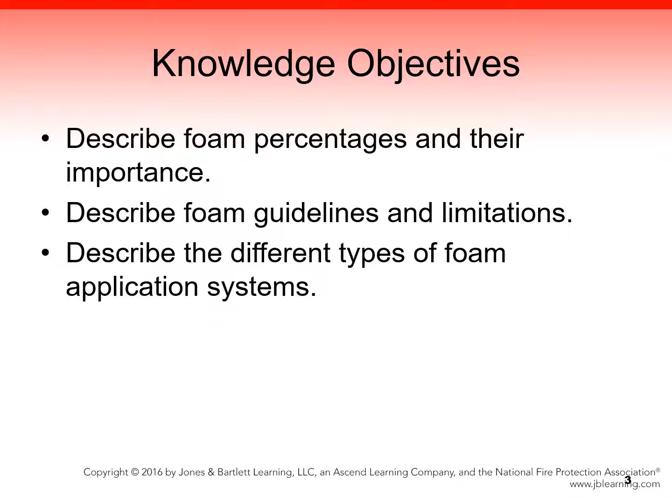Water has been the main means of suppressing fires for many years, and water is effective, bountiful, and relatively inexpensive to use. And while water is certainly effective, foams have added a new dimension to fighting fires, as I mentioned in the introduction.

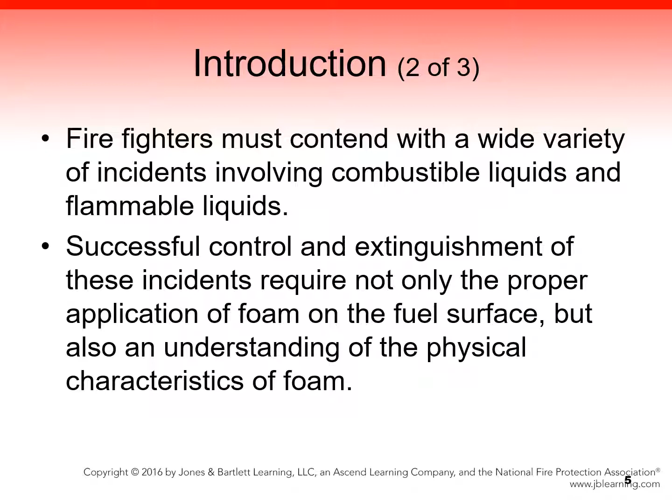Among the many hazards that firefighters must contend with today are a wide variety of incidents involving combustible liquids and flammable liquids, and successful control and extinguishment of these incidents requires not only proper application of foam on the fuel surface, but also an understanding of the physical characteristics of the foam itself. A full understanding of foam and its application is imperative to a safe and successful suppression operation.

Lack of familiarity with the chemical characteristics of foam and its application can cause severe problems for both you and your crew. Know your equipment and always operate safely. Improvements in and greater simplicity of application techniques and the versatility of foam concentrates makes the use of foam for all types of fires more common.

The National Institute of Standards and Technology, or NIST, has determined that foam is 3 to 5 times more effective than plain water in extinguishing fires, and this can justify its use and its added expense at an incident site.

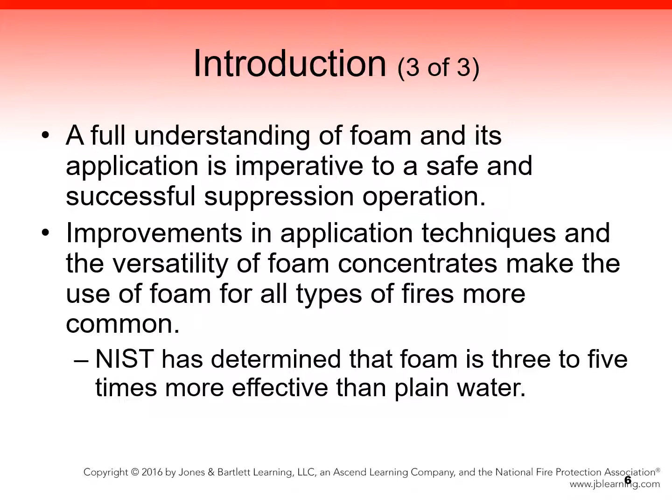While foam has been available for firefighting for many years and was first used in the 1900s, it was introduced as an extinguishing agent for flammable liquid fires. This original foam was produced by mixing two powders, aluminum sulfate and sodium bicarbonate, with water in a foam generator. This method was used for chemical foam extinguishers as well. Inside the fire extinguisher, the two chemicals were stored separately. Then to operate the fire extinguisher, a seal was broken and the extinguisher was inverted, allowing the aluminum sulfate and sodium bicarbonate to mix and create the foam.

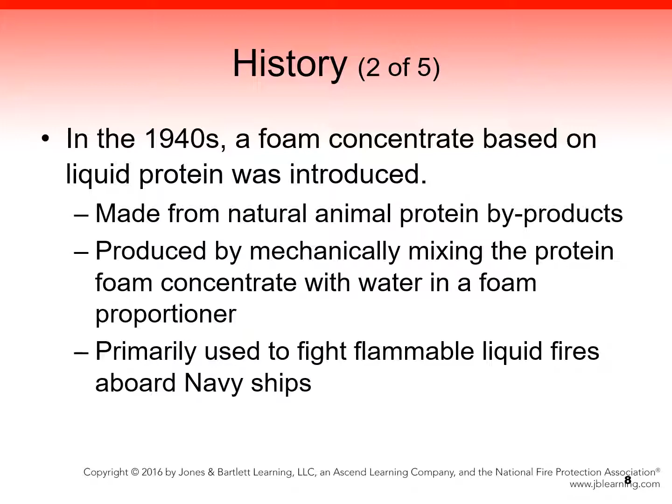In the 1940s, a foam concentrate based on liquid protein was introduced. This foam was made from natural animal byproducts. It was produced mechanically by mixing the protein foam concentrate with water in a foam proportioner. A foam proportioner is a device that mixes the foam concentrate into the fire stream in the proper percentage. Protein-based foam was primarily used to fight flammable liquid fires aboard Navy ships.

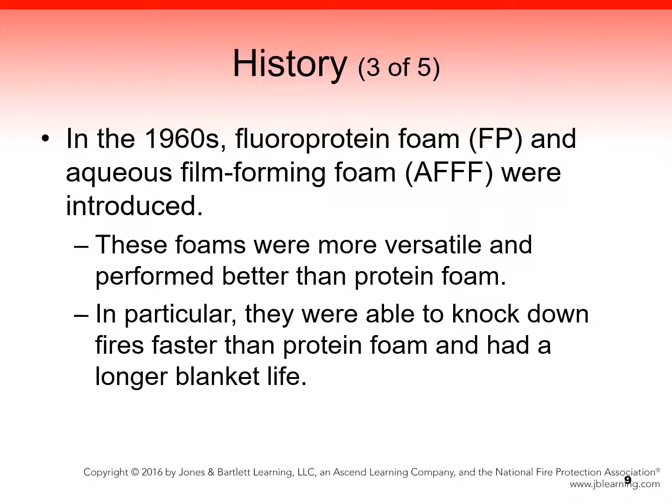In the 1960s, fluoroprotein foam, or FP, and aqueous film forming foam, or AFFF, were introduced. These foams were more versatile and performed better than protein foam. In particular, they were able to knock down fires faster than protein foam and had a longer blanket life. In the 1970s, alcohol-resistant foams became available. These foams could be used for fires involving hydrocarbon or polar solvent fuels. The introduction of alcohol-resistant foams allowed flexibility in dealing with the many types of fuels that firefighters encounter on a daily basis.

While the use of foam has been limited in the past for many reasons, the technological improvements made to foams and the equipment associated with their application have made these agents' use more common and acceptable in today's fire service. As more fire apparatus have been equipped with foam systems, operation and maintenance of these systems has emerged as an important skill for the driver-operator. The knowledge necessary to properly operate and maintain these systems can only come from learning about and training with all the systems.

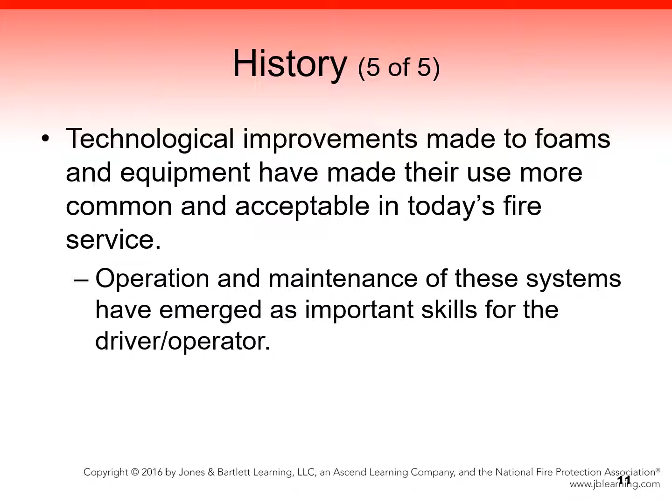With the introduction of the automobile and the industrial use of petroleum products, firefighters soon realized that water was not effective for extinguishing fires involving these types of products. Water is heavier than petroleum, so its application to petroleum-fueled fires caused more problems than it solved. In fact, water would actually spread the fire and make the situation worse. A method was needed to deal with the growing use of petroleum products and the resulting incidents when these products ignited. Firefighting foam was one of the methods available to deal with these issues.

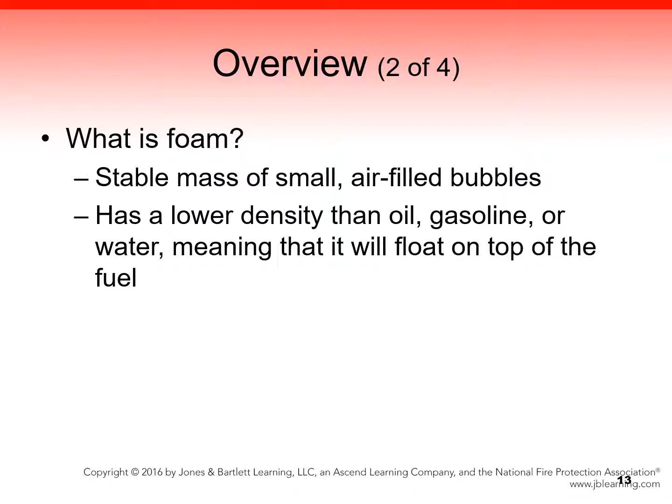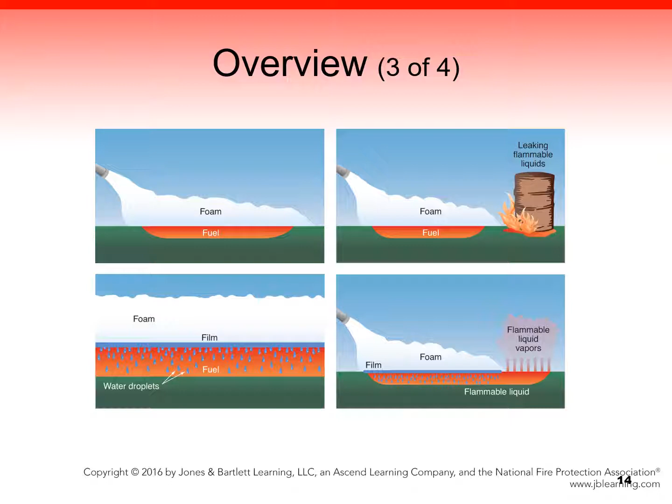So what is foam? The foam used for firefighting purposes is a stable mass of small air-filled bubbles. It has a lower density than oil, gasoline, or water, meaning it will float on top of the fuel. The way foam works to help extinguish a fire is simple, illustrated in figure 14-2. Once applied to the burning fuel, the foam will float and form a blanket on the surface. This blanket, if applied correctly, will stop or prevent the burning process by separating the fuel from the air, lowering the temperature of the fuel, and/or suppressing the release of flammable vapors.

Foam is created through the application of four components: water, foam concentrate, mechanical agitation, and air. First, water is mixed with a foam concentrate in various ratios to produce a foam solution. This solution must then be mixed with air by some form of mechanical agitation. In firefighting, this mechanical agitation usually takes the form of a nozzle that mixes the air and foam solution to form the final product, which is referred to as finished foam.

The ratio of water to foam concentrate is critical. Too little foam concentrate in the water will produce a foam solution that is too thin or lean to be effective, and may quickly dissipate into the fuel itself. Too much concentrate will produce a foam that may be too thick or rich to be properly expanded or aspirated when mixed with air. The expansion of foam solution depends on good mechanical agitation and effective aeration, which is the process of introducing air into the foam solution.

When an insufficient amount of air is introduced into the solution stream, the solution is poorly aerated, resulting in foam with too few bubbles. Fewer bubbles causes the foam to break down so quickly that it does not suppress vapors effectively, and poorly aerated foam will also break down quickly when exposed to heat and flame.

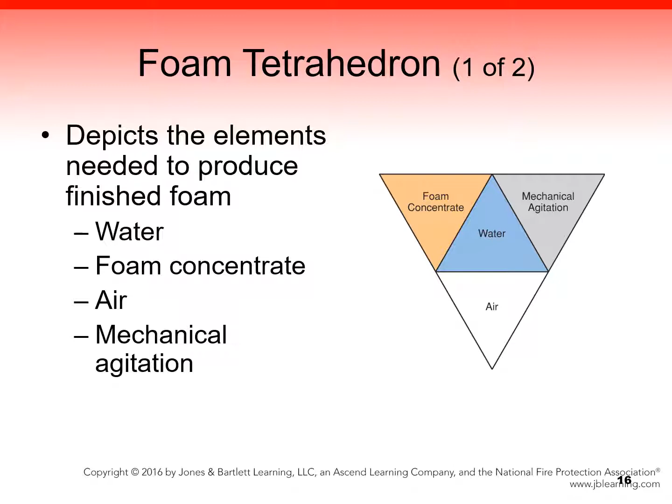Let's discuss the foam tetrahedron. A foam tetrahedron depicts the elements needed to produce finished foam, shown here in this slide, which is also in your book as figure 14-3. If any of the elements of the tetrahedron is missing or not present at the proper concentration, foam production will be affected. This results in poor quality, ineffective foam, or no foam being produced at all. The foam tetrahedron requires four components: water, foam concentrate, air, and mechanical agitation.

Foams come in two basic types: chemical foams and mechanical foams. Chemical foams are produced through a reaction between two chemicals, like those used in the chemical foam extinguishers of the 1800s. Today, this type of foam is rarely used because it requires the combination of two different chemicals before the foam can be made, which may be difficult to carry out at a fire scene. Also, because of the large amount of powders required, this type of foam has become obsolete in today's fire service.

Mechanical foams are produced when water and foam concentrate are mixed in the appropriate amounts, or proportioned, and the ratio of foam concentrate to water must be correct to ensure the foam creation and operation is effective. The class of materials involved in the spill or fire, which dictates the type of fire, determines the percentage of foam needed. Hydrocarbon fuels such as gasoline, jet fuel, and kerosene have a lower density than water. When these types of fuels and water are mixed, the two fluids quickly separate and the fuel rises to the top while the water remains on the bottom.

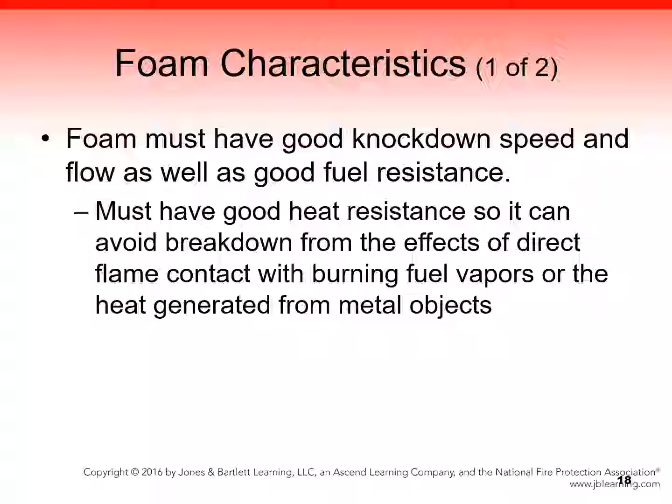Ideally, foam will produce a good vapor suppressing blanket. A vapor-tight foam blanket reduces the generation of flammable vapors above the fuel surface and minimizes the chance of reignition. This is illustrated in figure 14-5 in your text.

When used on polar solvent fuels, foam must also be alcohol resistant. Given that alcohol readily mixes with water and that foam is mostly water, a foam blanket that is not alcohol resistant will quickly dissolve into the fuel and be destroyed.

Now let's talk about some different foam classifications, and we'll start with Class A foams. Class A foams are used on ordinary combustible materials such as wood, textiles, and paper. It's also effective on organic materials such as straw and hay, and sometimes they're referred to as wetting agents. They're very effective because they improve the penetrating effect of water and allow for greater heat absorption.

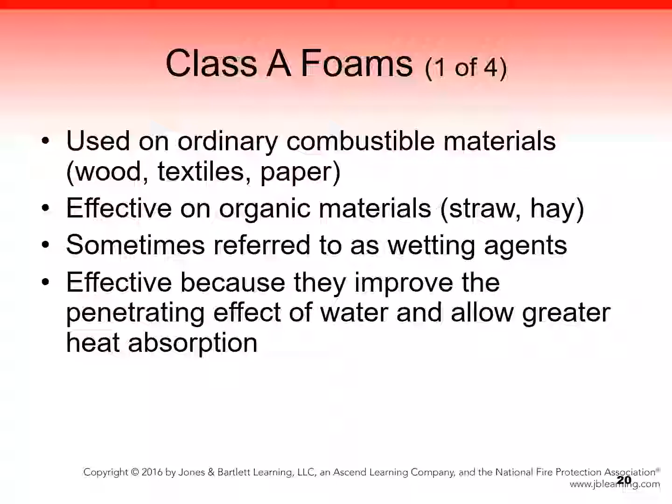According to foam manufacturers, these wetting agents can extinguish fires involving Class A materials as much as 20 times faster than water itself, and this is shown in figure 14-6 in your text.

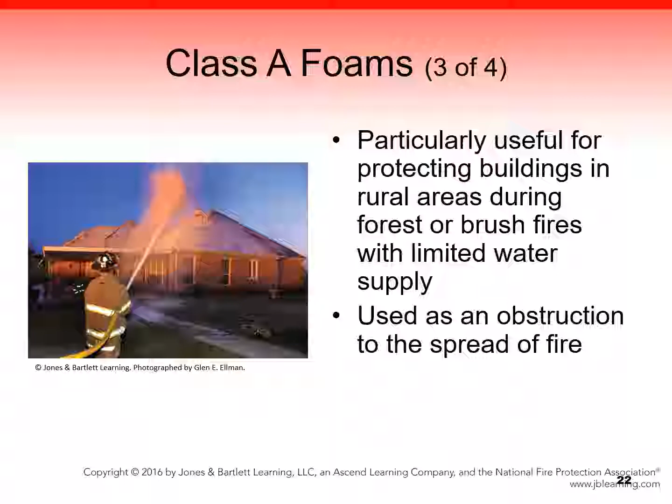Particularly useful for protecting buildings in rural areas during forest and brush fires when the water supply is limited is what a water penetrating foam is good for, and it can also be used as a fire barrier, that is, an obstruction to the spread of fire. A thick blanket of Class A foam applied to an exposure can provide adequate protection for that exposure, thereby preventing the spread of the fire, and this is shown in figure 14-7 in your text.

Class A foams are also used by many fire departments while performing initial attack and overhaul of fires. This increases the effectiveness of the water as an extinguishing agent by reducing the surface tension of the water. As a result, the water penetrates dense materials instead of running off of the surface. In addition, more heat is absorbed by the water.

The foam also keeps water in contact with unburned fuel to prevent its ignition, and it can be added to water streams and applied with various types of nozzles.

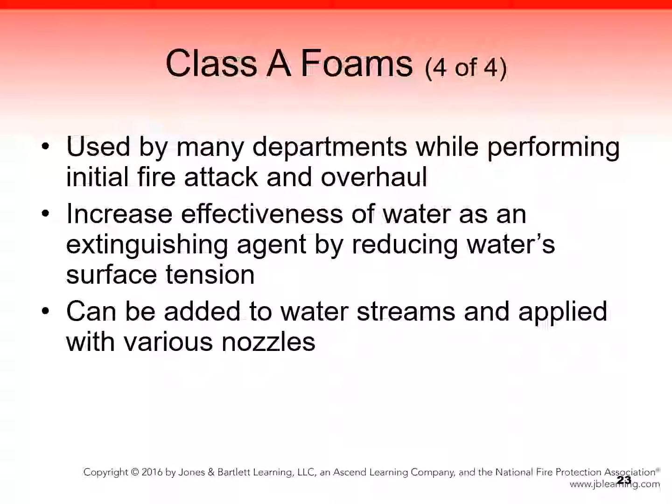Class B foams are used on hydrocarbon, combustible fuels, or polar solvent fires. Please see Table 14-1 on page 330 of your text for a little more information on this. Polar solvent and water miscible fuels such as acetone mix readily with water and will degrade the effectiveness of ordinary Class B foam. So Class B foams are divided into the following categories: protein foams, fluoroprotein foams, and alcohol-resistant film-forming fluoroprotein foams. That's known as AR-FFFP.

Now, wetting agents and foams in Class B foams is what we're going to talk about now, and there has been a significant amount of discussion over the years regarding nearly every wetting agent, additive, water additive, and foam. Most of these discussions have been and continue to be clouded with misinformation and misunderstanding about each extinguishment medium. It is common for firefighters to make the mistake that a wetting agent is a foam because they're very similar by sight, and the containers may be the same and they may have a similar appearance upon application. However, they are very different in chemical makeup.

A wetting agent reduces the surface tension of the water and enhances penetration into the fuel that is burning. A foam creates a stable mass of small air-filled bubbles with a lower density than oil, gas, or water and will float on top of burning fuel, creating a blanket that separates the fuel from the air, lowering the temperature and suppressing the vapors.

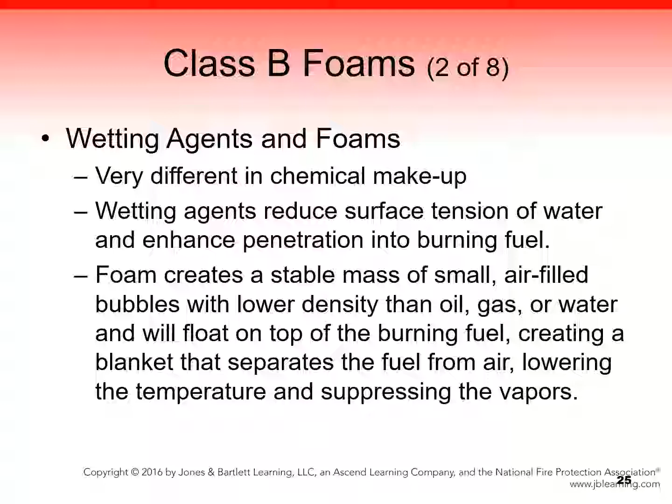When choosing a wetting agent or a foam, make sure the foam or wetting agent is listed by a nationally recognized listing agency. Always make sure you follow the manufacturer's guidelines for the foam or wetting agent, and always use caution when using foam or wetting agents on the following types of fires: those are flammable and combustible liquids and cooking media such as vegetable oil or animal fats.

Over the past 35 years, there have been some significant scientific advancements for both wetting agents and foams. It is wise to always ensure that the product is listed by an independent testing firm and meets the current National Fire Protection Association, or NFPA, standards. It is just as important to read and understand the manufacturer's specifications and have clear understanding of the limitations of both wetting agents and foams.

The future may bring such wetting agents that can handle both Class A and Class B fires with the recent development of NFPA 18A, which is the standard on water additives for fire control and vapor mitigation, and testing criteria designed to test water additives to suppress both classifications of fires with one extinguishing agent. But as of right now, there is no single agent.

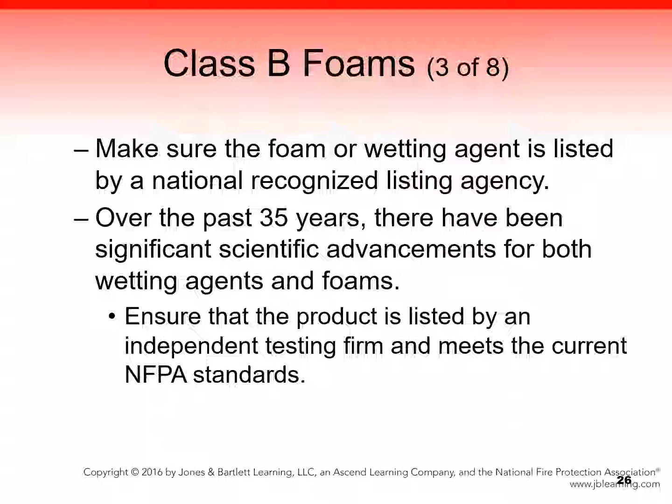Now let's discuss protein foams. Protein foams are used to extinguish Class B fires involving hydrocarbons. These agents can protect flammable and combustible liquids where they are stored, transported, and processed.

Protein foams contain naturally occurring proteins, that is, animal byproducts, as the foaming agent. They are based on keratin protein derived from sources such as chicken feathers or animal hooves that has gone through the process of hydrolysis. Protein foams also include stabilizers and inhibitors which prevent corrosion and control viscosity. They produce highly stabilized mechanical foam with good expansion properties, excellent heat and burnback resistance, and good drainage characteristics.

Regular protein foams may be created using either fresh or salt water, and these foams must be properly aspirated. They should not be used with non-aspirating structural fog nozzles. Regular protein foams have slower knockdown characteristics than other concentrates, but they provide a long-lasting foam blanket after the fire is extinguished. This is shown in Figure 14-8 in your text.

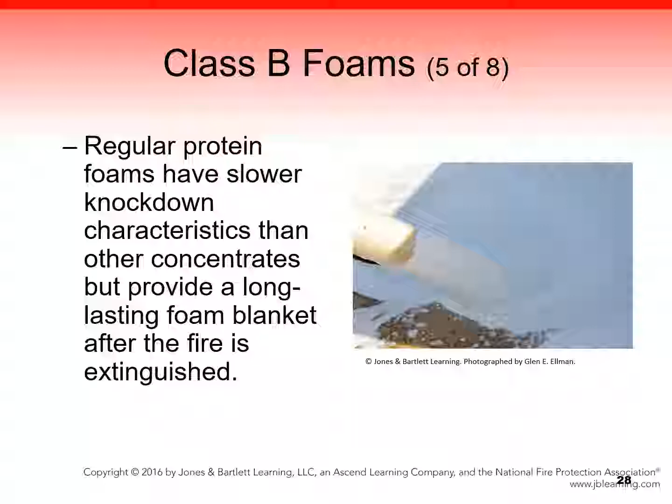Now, fluoroprotein foams, or also known as FP, consist of hydrolyzed protein, stabilizers, preservatives, and synthetic fluorocarbon surfactants.

They're used for hydrocarbon vapor suppression and extinguishment of fuel in-depth fires. FP, or fluoroprotein foams, are effective for subsurface application to hydrocarbon fuel storage tanks. Fluoroprotein foams are intended for use on hydrocarbon fuels and some other oxygenated fuel additives.

They have excellent heat and burnback resistance. They maintain a good foam blanket after the extinguishment of the fire, and the addition of surfactants makes the foam much more fluid. This increases the knockdown rate and provides better fuel tolerance than is possible with protein foam.

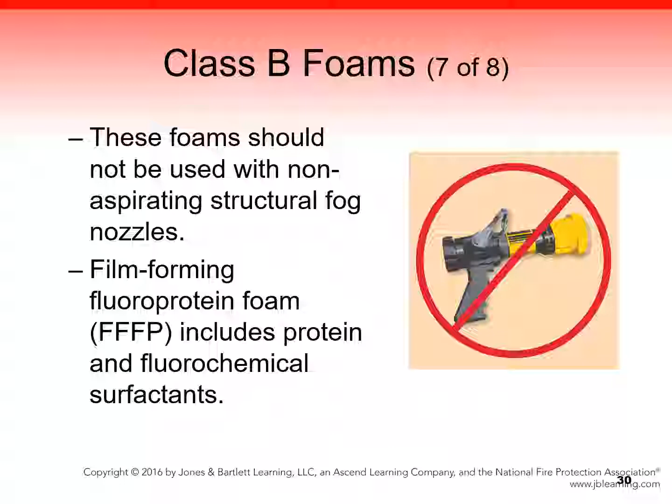Film-forming fluoroprotein foam, or triple FP, includes protein and fluorochemical surfactants. With these foams, the fluorochemical surfactants are generally present in higher concentrations than in standard FP. Triple FP is able to form a vapor sealing film on nonpolar solvents. The knockdown performance is improved because the foam releases an aqueous film on the surface of the hydrocarbon fuel.

Now, alcohol-resistant film-forming fluoroprotein foams can be used on both hydrocarbon and water-soluble fuels. On hydrocarbon fires, the film-forming ability of this foam allows for rapid fire knockdown and excellent burn-back resistance. On water-soluble fuels, its resistance to water-soluble solvents arises because a cohesive polymeric membrane forms on the fuel surface. This protects the foam from contact with polar fuels.

AR triple FP is basically triple FP with a polysaccharide polymer additive. Where polar solvents will destroy triple FP, the polymer in AR triple FP forms a membrane to separate the polar solvent from the foam blanket.

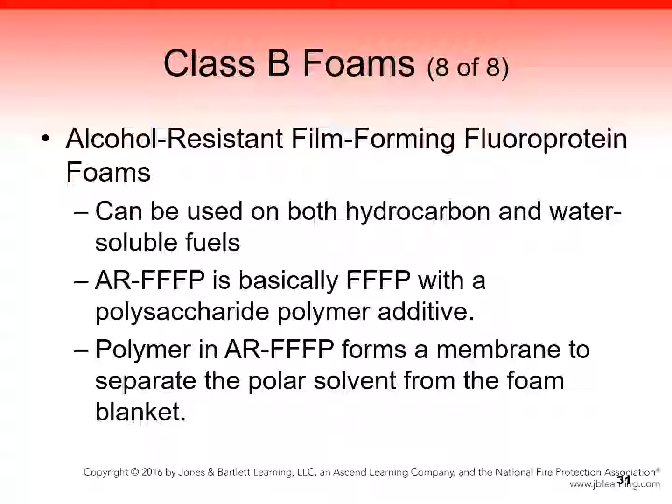Now let's discuss synthetic foams. Aqueous film-forming foam, or AFFF, is based on combinations of fluorochemical surfactants, hydrocarbon surfactants, and solvents. AFFF requires a low-energy source to produce high-quality foam. This foam can be applied using a variety of foam application systems. Because of the versatility of AFFF, it is used by the majority of municipal and airport fire departments in North America. AFFF is also used at refineries, manufacturing plants, and other operations involving flammable liquids.

AFFF is very fluid and quickly flows around obstacles and across a fuel surface. Its ability to flow quickly allows AFFF to achieve a very fast knockdown of hydrocarbon fires. This foam can be used as a premixed solution, is compatible with dry chemical agents, and can be created using either fresh or salt water.

AFFF consists of a mixture of synthetic foaming agents and fluorochemical surfactants. It extinguishes fire by forming an aqueous film on the fuel surface, and this film comprises a thin layer of foam solution which quickly spreads across the surface of a hydrocarbon fuel, creating an extremely fast fire knockdown. This is shown in figure 14-10 in your book.

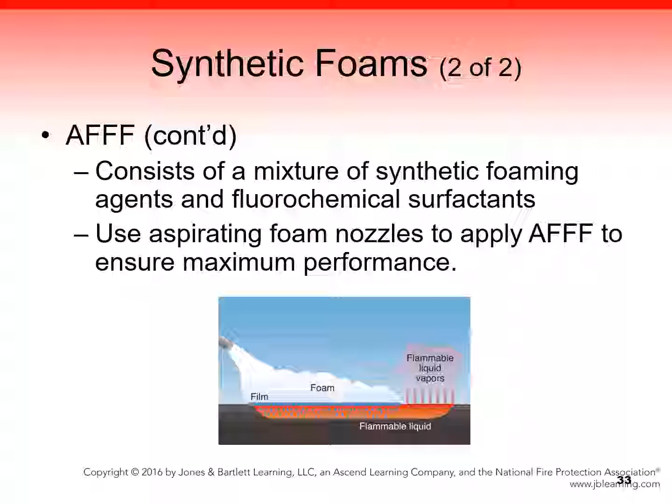Let's discuss alcohol-resistant aqueous film-forming foams. This comprises a combination of synthetic detergents, fluorochemicals, and high molecular weight polymers. Neither polar solvents nor water-miscible fuels are compatible with non-alcohol resistant foams.

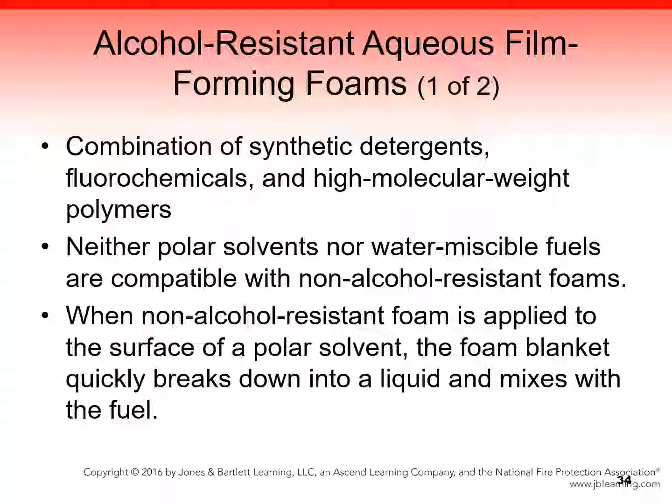Common polar solvents include solutions of the following compounds: alcohols, including isopropyl, methanol, and ethanol; esters, including butyl and acetate; ketones, including methyl and ethyl ketone; and aldehydes, including acetaldehyde and tolualdehyde. When non-alcohol resistant foam is applied to the surface of a polar solvent, the foam blanket quickly breaks down into a liquid and mixes with the fuel.

By comparison, AR-AFFF acts like conventional AFFF on hydrocarbon fuels, forming an aqueous film on the fuel surface. When applied to polar solvents, however, AR-AFFF forms a polymeric membrane on the fuel surface. This membrane separates the fuel from the foam and prevents destruction of the foam blanket. AR-AFFF is one of the most versatile types of foam. It provides good knockdown and burn back resistance and has a high fuel tolerance on polar solvent and hydrocarbon fires.

Synthetic detergent foams or high expansion foams are highly effective in confined space firefighting operations and in areas where access is limited or entry is dangerous to firefighters. Some examples include basements, shipboard compartments, warehouses, aircraft hangars, and mine shafts. These types of foams can be used in both fixed generating systems and portable foam generators. High expansion foams can be used on either Class A or Class B fires.

Each foam manufacturer offers a different product. It is your responsibility as a driver-operator to determine which foam can be used on the fire you're facing. High expansion foams are based on combinations of hydrocarbon surfactants and solvents, and they are useful on fuels such as liquefied natural gas for vapor dispersion and control. In certain concentrations, these foams are effective extinguishing agents for flammable liquid spill fires of most types. The foam concentrates are normally proportioned in ratios between 1 to 3% for these uses. Please see figure 14-12 in your text for an example.

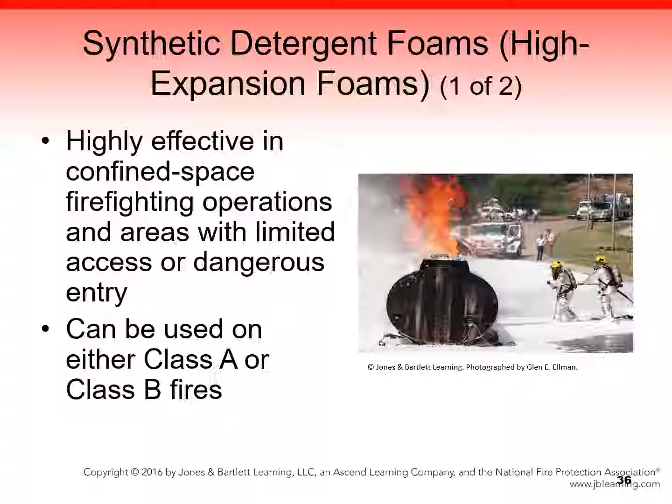Fire control and extinguishment are achieved by rapid smothering and cooling of the fire. High expansion foams have a tremendous smothering and steam generation effect because the water contained in them is divided into such fine particles, which enhances the heat absorption quality of the water. This factor also presents a potential hazard, however. Care must be taken with regard to electrical power sources in the area when this type of foam is applied. Remember that foam is mostly water and presents the same electrical shock potential to firefighters as does water application by itself.

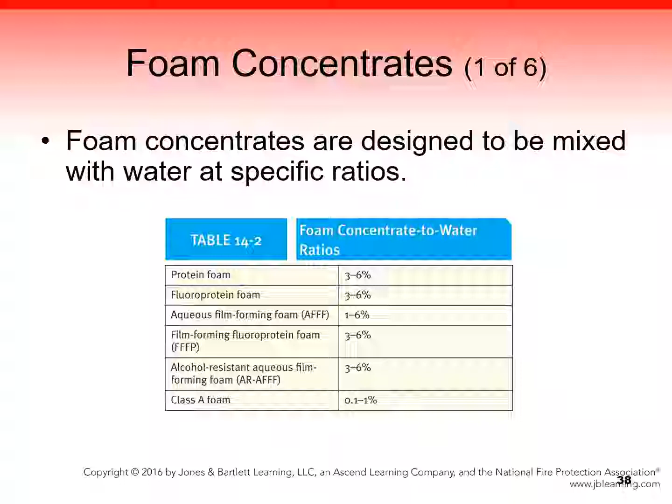Now let's talk about foam concentrates. Foam concentrates are designed to be mixed with water at specific ratios. And here is table 14-2, which is also in your text. Please make sure that you review it. Foam concentrate ratios vary from 0.1 to 1% for Class A foams and from 1 to 6% for Class B, i.e. 1 to 6% foam concentrate to water ratio in the final foam product. The amount of concentrate varies depending on the manufacturer, the type of application, and the type of fuel.

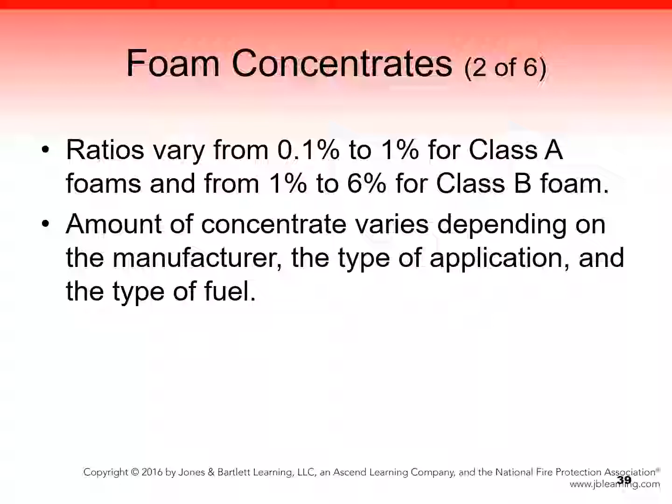For example, when using Class A foam for initial fire attack on a vehicle fire, you might use a 0.3 or a 0.5% ratio of foam concentrate to water. This ratio allows the foam to help extinguish the fire without creating too much foam. If you were supplying a hose line that was spraying foam on a house to protect it during a brush fire, you might increase the ratio to 1%, thereby creating a thicker foam that would last longer and protect the house for an extended period, depending on your department's standard operating procedures / standard operating guidelines and the manufacturer's recommendations.

The foam concentrate must be proportioned at the percentage listed by its manufacturer. Each foam is tested and approved for certain types of fires and at specific ratios. Always follow the manufacturer's guidelines when using this product. The foam concentrates are manufactured at different percentages for a variety of reasons. Thus, the product's components include the concentrate, which is a unique chemical compound, plus any freeze protection additives. Military use specifications and cost are some of the basic factors that determine the percentage of concentrate used in any particular situation.

The current trend is to keep foam concentrate percentages as low as possible for several reasons. Lower proportioning means less bulk in storage for fire departments. They also mean that you can double your firefighting capacity by carrying the same volume of foam concentrate, and you can cut your foam supply in half without reducing the company's fire suppression capabilities. Lower proportioning rates can reduce the cost of fixed foam system components and concentrate transportation costs.

Historically, foam concentrates were manufactured for use at ratios between 3 and 6%. Today, foam concentrates are produced for ratios as low as 0.1% and as high as 6%. This depends on the liquid fuel and the manner in which the foam is to be used. Remember, the foam concentrate percentage must match the fuel to which the foam is being applied. If a mismatch occurs, the foam may not be effective in controlling the fire.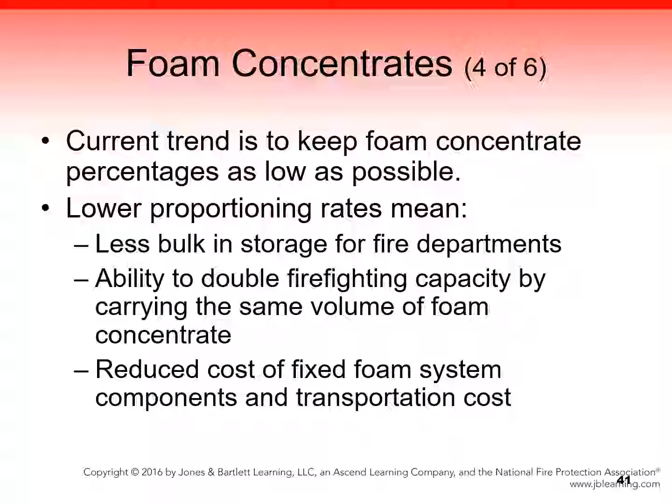Alcohol-resistant foams can be used effectively on both hydrocarbon and polar solvent fuels. AR-AFFF is a commonly used concentrate for this purpose. It is available in a variety of percentages. For example, AR-AFFF concentrate is available as a 3%/3% product, meaning that it can be used at 3% for incidents involving either hydrocarbon fuels or polar solvents.

It is also available as a 3%/6% mixture. This means that foams for hydrocarbon-based incidents are proportioned at a 3% concentration ratio, and foams for incidents involving polar solvents are proportioned at a 6% concentrate ratio. Another option available is the AR-AFFF 1%/3% product. This means foams for hydrocarbon-based incidents are proportioned at 1%, and foams for polar solvent-based incidents are proportioned at 3% or lower for newer concentrates.

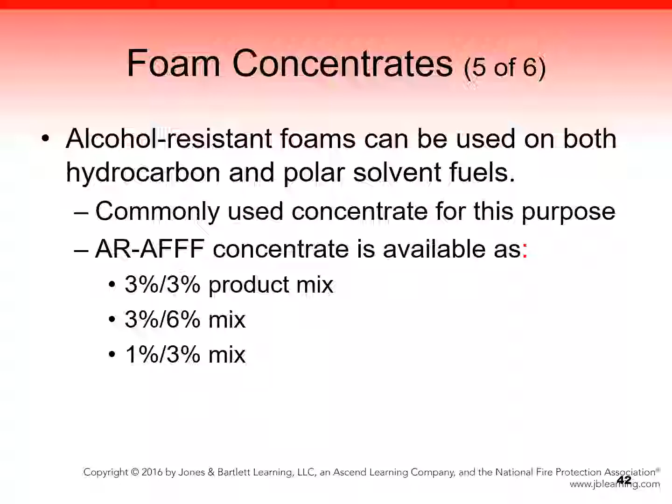Given the many types of foam concentrates available, the selection of the right concentrate is critical to the safe and effective handling of an incident. Knowledge of the foam types and systems available will assist incident commanders, ICs, in their ability to mitigate an incident. The importance of pre-planning and training for these types of incidents cannot be stressed strongly enough.

Now let's discuss foam expansion rates. The foam expansion rate is the ratio of finished foam to foam solution after the concentrate is mixed with water, agitated, and aspirated through a foam making appliance. For example, a low expansion foam has an expansion ratio of 20:1. This means that 20 parts of finished foam are produced for every 1 part of foam solution. The air inside the bubbles makes up the expanded part of the finished foam.

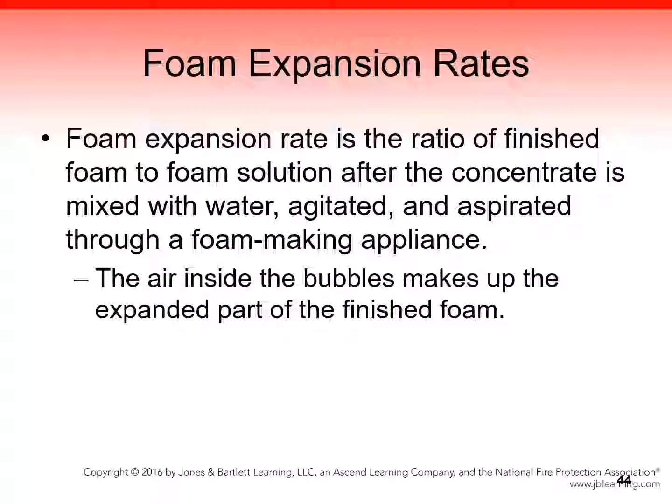NFPA 11, which is the standard for low, medium, and high expansion foam, classifies foam concentrates into 3 expansion ranges: low expansion, medium expansion, and high expansion. Low expansion foam has a foam expansion ratio of up to 20:1. This type of foam is primarily designed for use on flammable and combustible liquids. Low expansion foam is effective in controlling and extinguishing most Class B fires, and special low expansion foams are also used on Class A fires where the penetrating and cooling effect of the foam solution is important.

Medium expansion foam has a foam expansion rate in the range of 20:1 up to 200:1. This kind of foam is used primarily to suppress vapors from hazardous chemicals. Foams with expansion ratios between 30:1 and 55:1 have been found to produce the optimal foam blanket for vapor mitigation of highly reactive chemicals and low boiling point organics.

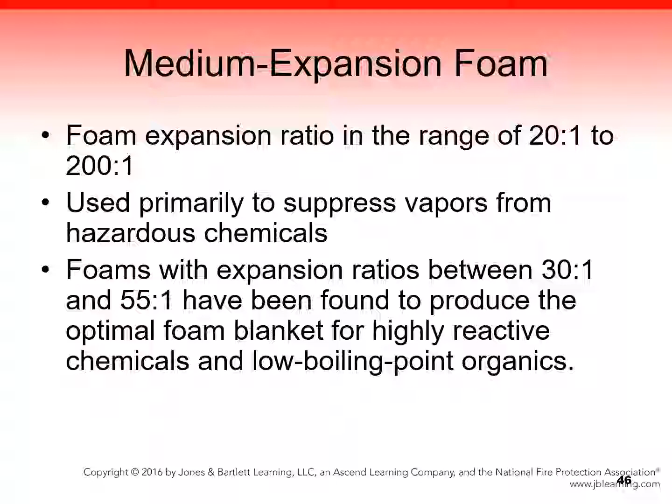High expansion foam has a foam expansion rate in the range of 200:1 up to 1,000:1. This type of foam is designed for confined space firefighting, and this foam concentrate consists of synthetic detergent type foam used in confined spaces such as basements, mines, shipboard, and aircraft hangars.

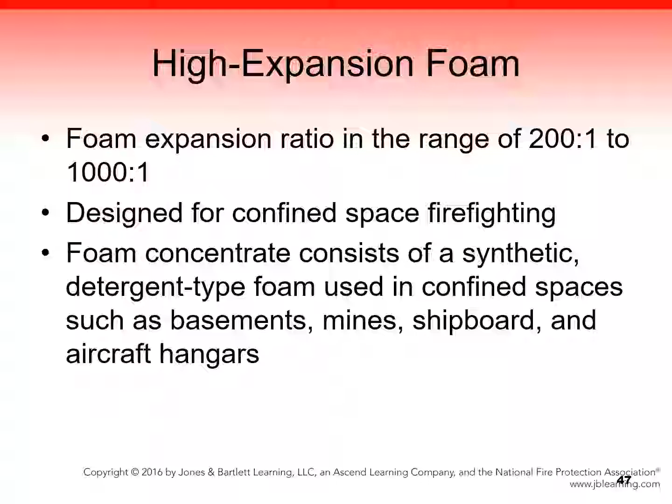Now let's discuss proportioning of foam concentrate. The application of foams at the proper percentage depends on the foam concentrate being mixed at the proper percentage with water. The percentage of concentrate may be introduced into the water stream by any of several methods. It is imperative that you become familiar with the type of equipment that is used in your agency's foam operations. As the driver-operator, you have the responsibility to produce effective foam streams.

You must have the knowledge of all aspects of foam operations so that the foam produced will do what it is intended to do. Foam that is not mixed at the proper percentage or is used on a material or product for which it was not intended will not only be ineffective, but can also put firefighters on hose lines in danger. To produce finished foam, the water, air, and foam concentrate must be mixed at the proper ratio.

Foam concentrate must be added to the water that is flowing from a discharge line to form the proper mixture. This mixture or percentage is based on the type of foam concentrate used, the type of material involved in the incident, and the type of equipment used to produce the finished foam. The foam proportioner is the device that mixes the foam concentrate into the fire stream in the proper percentage. The two types of proportioners, eductors and injectors, are available in a wide range of sizes and capabilities.

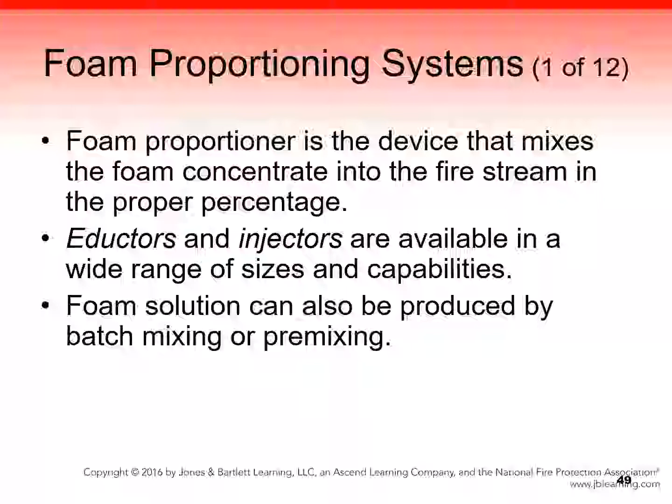Foam solution can also be produced by batch mixing or pre-mixing. Batch mixing is the process of pouring foam concentrate directly into the fire apparatus water tank, thereby mixing a large amount of foam at one time. This is illustrated in Figure 14-13.

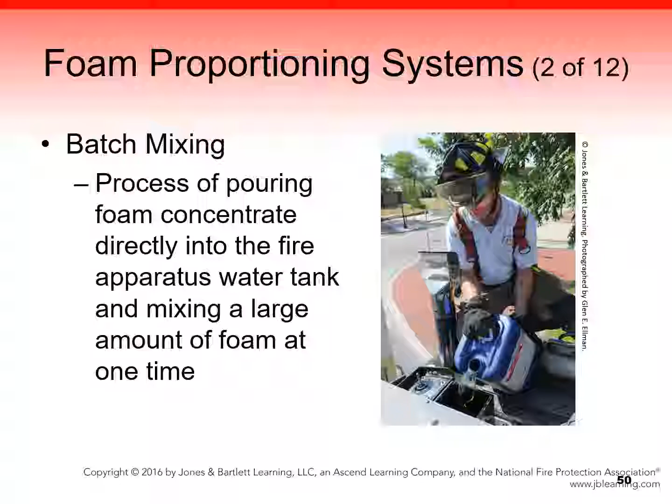While this method requires no special appliances, some problems may arise with batch mixing. The foam solution is corrosive to the apparatus's pipes, pump, and water tank, and it is difficult to adjust and maintain the correct application rate, especially if additional water is supplied from an external source. The addition of foam solution may also cause the gauges to become inaccurate, such that the water tank overflows with foam when the pump is recirculating the mixture.

Class A foam concentrates that are batch mixed must be used within 24 hours if they are to be effective. As with some of the other systems used to create foam, all discharges will deliver foam when it is supplied from an onboard tank. When the water tank is empty, however, there is no longer any foam available, so a new batch has to be mixed.

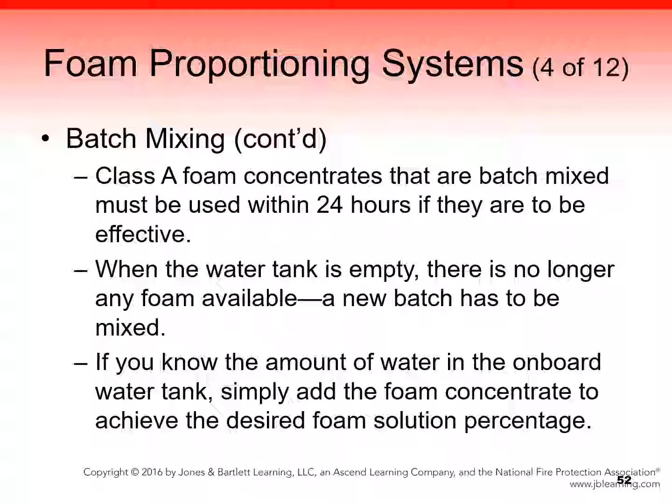Pre-mixing of foam solutions is a technique that usually is reserved for portable fire extinguishers. Many fire departments use these extinguishers filled with pre-mixed foam solutions for small flammable liquid spills at the scene of a motor vehicle accident. They are quick and easy to deploy, but contain a limited amount of foam and should be applied only to small fires or fuel spills.

Always refer to the foam manufacturer's recommendations regarding how long the foam concentrate should be used after mixing it with water. Foam eductors is what we're going to discuss now. Induction involves the use of an eductor to introduce the appropriate amount of foam concentrate into a stream of water flowing from a discharge. An eductor is an appliance that uses the Venturi principle, i.e., suction effect, to introduce foam concentrate into the water stream.

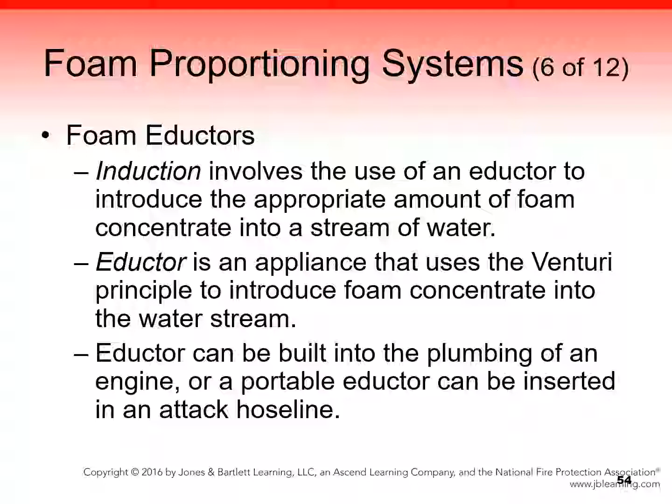An eductor can be built into the plumbing of an engine, or a portable eductor can be inserted into an attack hose line. A foam eductor is usually designed to work at a predetermined pressure and flow rate, and its metering valve can be adjusted to set the percentage of foam concentrate that is educted into the stream. For example, a simple inline eductor has a small pickup tube that is submerged in foam concentrate. As the water travels through the inline eductor, it draws foam into the water at the desired percentage using the Venturi principle. Two types of eductors are used in the fire service today: inline eductors and bypass eductors.

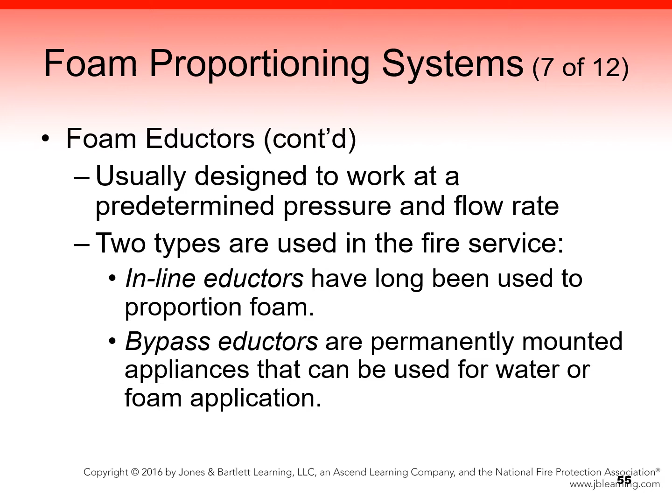As mentioned earlier, eductors use the Venturi principle to mix a specific amount of foam concentrate into the water stream. Specifically, a suction effect is created at the narrow inlet to the eductor. This narrow passage increases water velocity, which reduces the water's pressure as it flows into the larger eduction area. Foam concentrate is introduced into the eductor using a metering valve. This allows the driver-operator to adjust the percentage of foam concentrate being added to the water stream.

Most eductors are calibrated to flow the rated capacity at 200 pounds per square inch inlet pressure. An eductor inlet pressure of 200 psi is necessary to overcome friction loss through the eductor as well as the friction loss between the eductor and the nozzle. Eductors are available for delivering flow rates of 30, 60, 95, 125, and 250 gallons per minute. The nozzle used with the system must match the flow rating of the eductor.

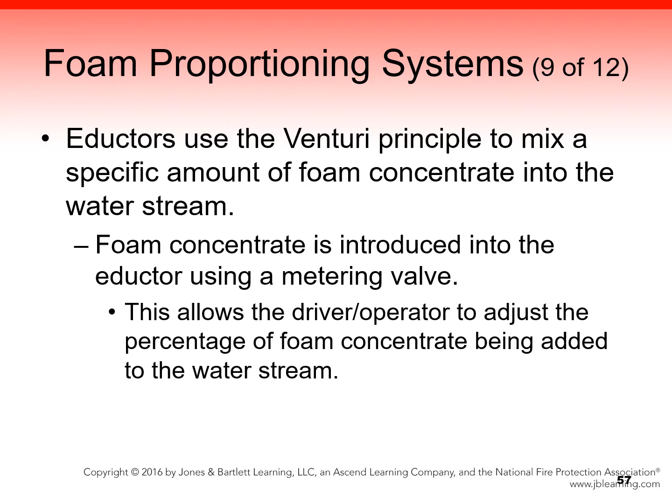The metering device controls the flow of concentrate into the eductor, as shown in Figure 14-15. The amount of foam concentrate introduced into the water stream is controlled by adjusting the metering valve.

As the driver operator, you should adjust the metering valve to the desired percentage to handle the situation at hand. Metering valves have adjustable settings that range from 0, which is the closed position, up to 6%.

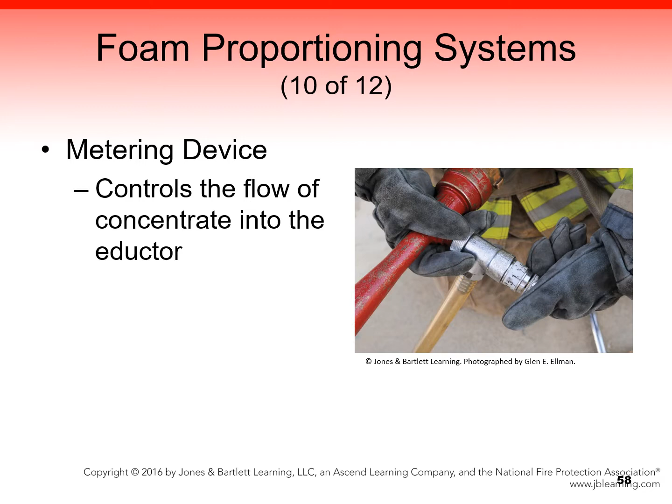The percentage set on the metering valve will be achieved only if the inlet pressure at the eductor matches the manufacturer's recommended inlet pressure. If the eductor is operated at less than the recommended inlet pressure, a lower flow of water will go through the eductor.

This lower flow of water will in turn result in a higher percentage of foam concentrate being introduced into the water stream. Depending on the available supply of foam concentrate, unnecessary wastage of foam concentrate will occur, and the driver operator could run out of foam before the fire is extinguished.

The opposite will occur if the inlet pressure into the eductor exceeds the pressure recommended by the manufacturer. A higher inlet pressure at the eductor will cause the foam solution to have a lower percentage of concentrate. This could affect the company's ability to handle the situation in which the foam is being applied.

Operating the inline eductor. The inline eductor is a very simple, efficient, and inexpensive type of foam proportioner. Many fire departments still use it as standard equipment to create foam at their fire scenes.

These devices are constructed out of rugged brass alloys and, if properly maintained, can last for many years.

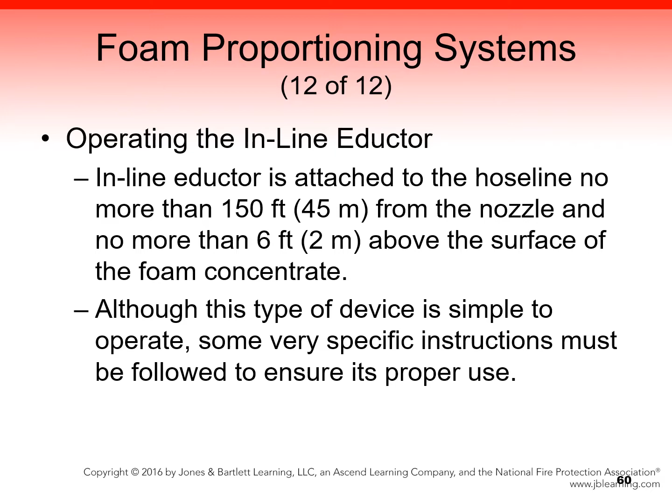Let's talk about the around-the-pump proportioning system. It operates on the same principle as the inline or bypass eductor system. It diverts a portion of the water pump's output from the discharge side of the pump and sends it through an eductor.

A vacuum is created at the eductor's foam concentrate inlet, which draws foam concentrate through the metering valve and into the eductor. The foam solution of water and concentrate is then sent to the suction side of the water pump, where it mixes with the incoming water and is distributed throughout the discharge piping.

The around-the-pump system offers several advantages over other foam creation methods. The process used for engaging the pump is the same for water or foam operations. The variable flow discharge rate allows for adjustment of the foam depending on the specific application.

Variable pressure operations are possible, usually within a range of 125 to 250 psi. There are no back pressure restrictions because the system is not affected by hose length or elevation loss. And there are no nozzle restrictions because the system will operate with any size or type of fixed gallon nozzle.

Around-the-pump systems also have certain limitations with which you must be familiar. All discharges will have either foam or water available at the same time. You will not be able to supply some lines with water and other lines with foam simultaneously. Either one or the other must be chosen.

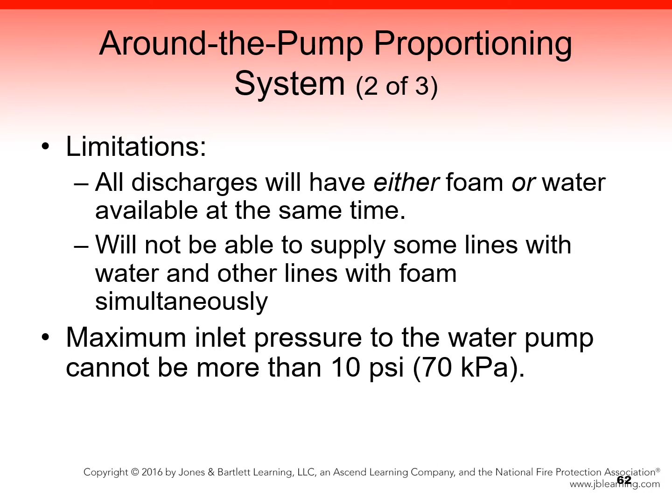The maximum inlet pressure to the water pump cannot be more than 10 psi. Any pressure greater than 10 psi will affect the operation of the eductor. Some manufacturer systems are designed to operate with an inlet pressure as much as 40 psi. Check your system's operating instructions for the proper inlet pressure.

Around-the-pump systems are intended to operate with water supplied from the onboard tank or from a draft. As a consequence, use of a pressurized source, like a hydrant or relay, will affect the operation of the system.

Most fire apparatus with around-the-pump systems have a direct tank fill that does not go through the fire pump. In such systems, the tank is filled directly from the pressurized source, and the water pump supply comes from an onboard tank. All discharges must be flushed after the foam operation is ended, even if they were not used.

When using automatic nozzles, the flow must be determined to ensure that you set the metering valve correctly. The appropriate setting for the metering valve depends on the type of concentrate being used, the percentage needed for the incident, and the rate of flow in gallons per minute.

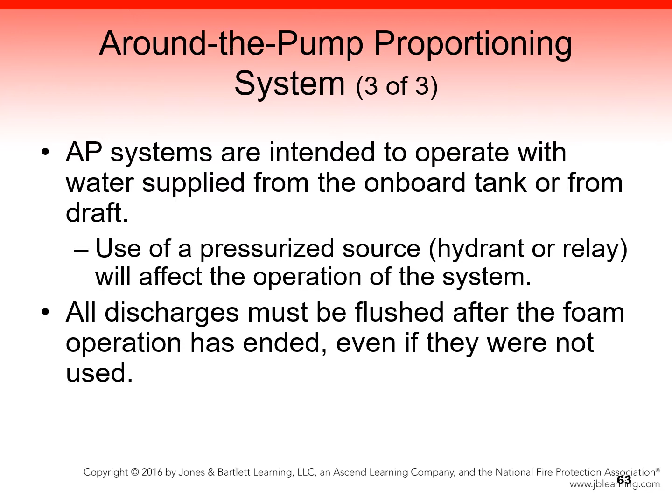When the flow rate changes, such as when a line is shut down, the metering valve needs to be adjusted to accommodate the new flow. To operate an around-the-pump system, follow the steps in Skill Drill 14-3.

Now let's talk about a balanced pressure proportioning system. Balanced pressure systems are extremely versatile and accurate means to deliver foam.

The system uses a diaphragm-type pressure control valve to sense and balance the pressures in the foam concentrate and water lines to the proportioner. The valve keeps the foam concentrate and water pressure in balance by allowing excess foam concentrate to return to the foam concentrate storage tank, as shown in figure 14-16. This proportioning occurs automatically for flows within the operating limits of the foam concentrate pump and the discharges.

The foam concentrate pump is a separate pump that supplies foam concentrate to the pressure control valve and the ratio controller. The pressure control valve acts as a balancing valve. It maintains equal foam concentrate and water pressures at the ratio controllers. Thus, the pressure control valve automatically maintains equal pressure within the foam creation system. Unused foam concentrate from the foam pump discharge is returned to the foam concentrate storage tank.

A ratio controller is a device required for each foam outlet to proportion the correct amount of foam concentrate into the water stream over a wide range of flows with minimal pressure loss. This modified Venturi device provides a metered pressure drop for controlled injection of foam concentrate into a reduced pressure zone. Metering valves receive foam concentrate from the foam pump and in turn discharge that concentrate to the individual ratio controllers.

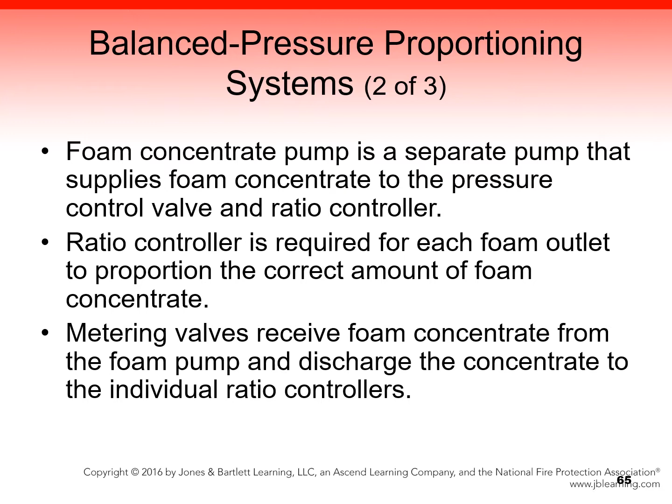A manual throttling control valve located at the pump panel enables the driver operator to override the automatic system by increasing or decreasing foam concentrate pressure in case a problem occurs within the system. Many balanced pressure systems are equipped with a foam heat exchanger. The heat exchanger uses water as its cooling source and prevents the foam concentrate from overheating. To operate a balanced pressure proportioning system, follow the steps outlined in Skill Drill 14-4.

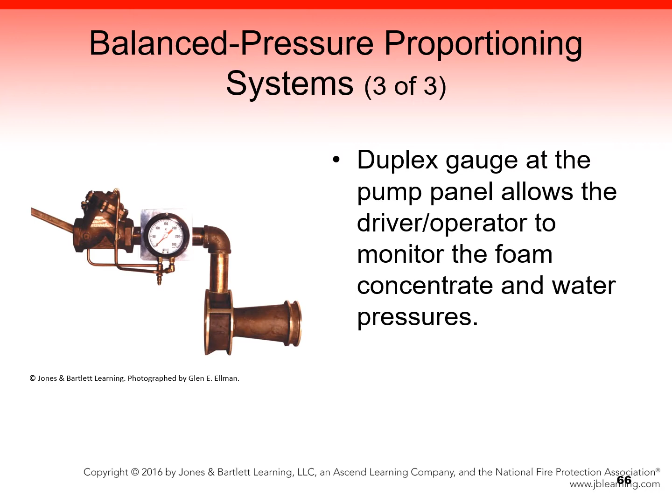Injection systems use an electrically operated variable speed foam concentrate pump that directly injects foam concentrate into the discharge side of the pump manifold. Injection systems are the most common type of system in use today. They are designed for use with Class A foam concentrates and with many Class B foam concentrates, depending on the viscosity of the concentrate. Injection systems depend on the water flow for their operation.

They will adjust the amount of foam concentrate being injected into the discharge manifold depending on the flow rate in gallons per minute and the percentage set by the driver operator. The foam concentrate pump will also adjust its operating speed depending on the amount of water flowing, and injector systems are not affected by changes in suction and discharge pressure.

The only limitation on such a system is the rated capacity of the foam concentrate pump. There are many different sizes of foam concentrate pumps available, so it is imperative that you know the limits of the specific pumps used on your department's apparatus.

Direct injection systems are very user-friendly. A control unit located at the pump panel allows the driver operator to operate the foam system. This control unit has an on-off button that starts and secures the foam operations. It also allows the driver operator to monitor the water flow rate, concentrate injection percentage, total amount of water flowing, and the total amount of concentrate used.

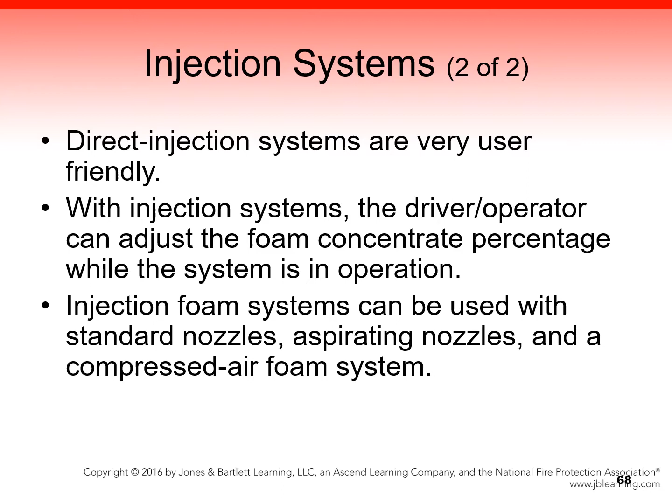Compressed air foam systems combine compressed air and foam solution to create a finished foam. They are designed for quick and effective fire attack and exposure protection. This type of system is generally used to generate Class A foam, specifically a high-quality finished foam that clings to vertical surfaces, as shown in Figure 14-18.

This foam holds moisture on the fuel surface, where it evaporates or penetrates, thereby cooling and lowering the fuel's temperature.

The production of finished foam depends on the correct mixture of water, foam concentrate, and air within the CAFS. This kind of system uses a fire pump, a foam concentrate injection system, and an air compressor to produce high-quality finished foam streams inside the fire apparatus piping. The foam aeration on the CAFS takes place at the pump discharge, that is, air introduced at the pump. Thus, the foam solution is mixed with air prior to reaching the end of the hose line. This type of foam or system allows for more uniform bubble structure and a better finished foam.

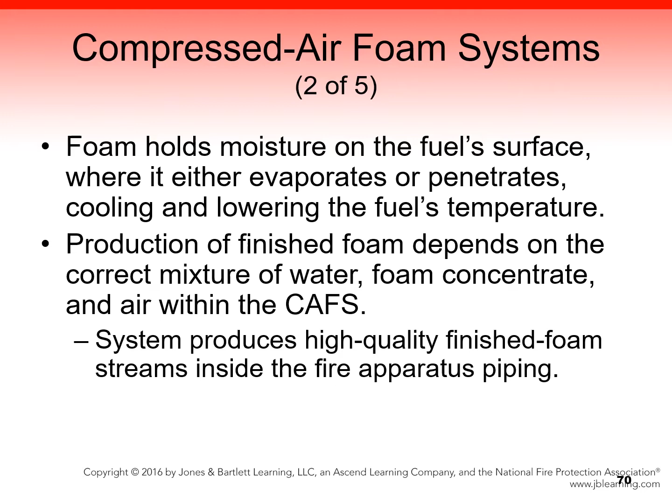A CAFS has some key benefits for firefighting operation. The quality of the foam is greatly improved due to its consistently smaller bubble structure. The foam produced by the CAFS works 4 to 5 times faster than water in suppressing fire.

A CAFS uses less water, thereby reducing the extent of water damage. The quick knockdown, fast fire suppression, and less extensive water damage associated with this type of foam system may help fire investigators in determining the cause of the fire.

The reach of the fire stream is improved, and the foam discharge will be lighter than water because the discharging foam is a mixture of foam solution and air. The improved stream reach allows for making the initial fire attack from a greater distance, and this reduces risk of injury to firefighters.

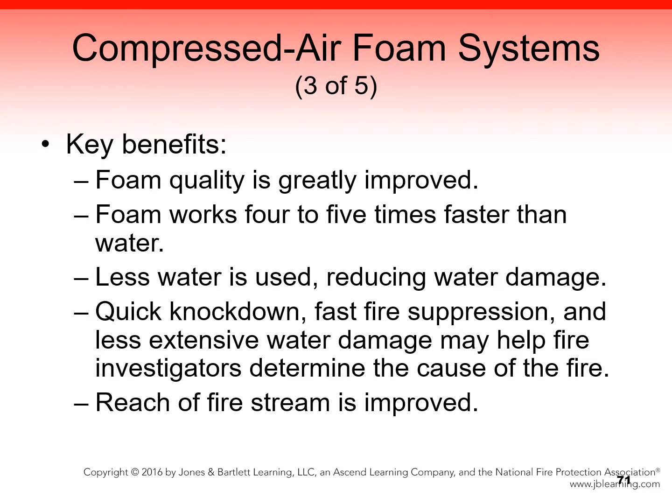The weight of the attack line is less than half of a line containing just water. CAFS hose lines are typically filled with approximately 30% compressed air. Firefighters will be able to move the lines more easily, which will reduce their fatigue. Because the hose is filled with air, friction loss is insignificant, and there is not the normal pressure loss with elevation.

Driver operators should also be aware of some potentially problematic issues dealing with the CAFS. The driver operator needs to be familiar with the operation of the air compressor. Water and air are immiscible, so foam solution must be present in the water stream prior to injection of compressed air. If the foam concentrate is not present, unmixed water and air will be discharged in an erratic manner called slug flow, and the hose line could be jerked out of the hands of the firefighters.

A CAFS burst hose line will react more radically due to the air in the line. Nozzle reaction is greater due to air in the CAFS hose, so nozzles should be opened more slowly.

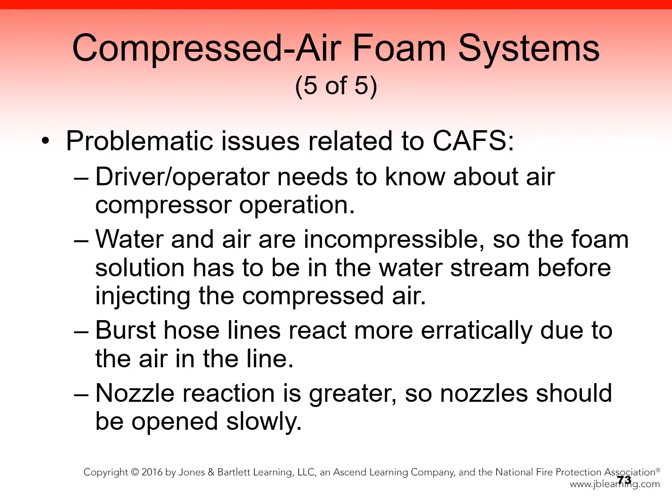Operating a CAFS is dependent on your apparatus-specific system. Always refer to the manufacturer's recommendations and procedures for your system's make and model. In general, to operate a CAFS, follow the steps in Skill Drill 14-6.

Now let's discuss nozzles. Nozzles are an important part of all foam operations. The proper nozzle is needed for firefighters to be able to produce a good quality foam blanket. The following types of nozzles are available: medium and high expansion foam generators, master stream foam nozzles, air aspirating foam nozzles, smoothbore nozzles, and fog nozzles.

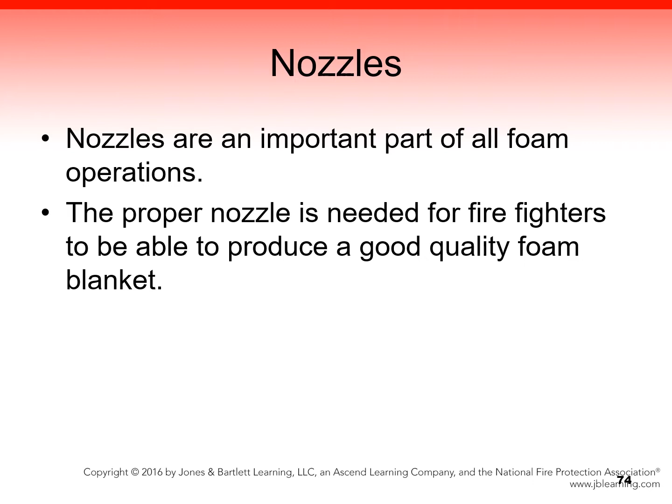Medium and high expansion foam generators are what we're going to talk about first. Foam generators produce medium and high expansion foams, and these devices usually consist of either a mechanical blower or water aspirating appliance.

A water powered aspirating type of generator uses a water motor driven fan to produce the required airflow. Some water powered high expansion generators are designed to achieve expansion rates of as much as 1,000 gallons of finished foam for every 1 gallon of foam solution. The final expansion ratio achieved depends on the generator used, the solution flow rate, and the operating pressure.

Mechanical generators operate similarly to water aspirating generators, as shown in illustration 14-19. The difference is that the mechanical generator is electrically powered by a fan which forces the airflow through the unit.

High expansion foam systems are designed for use in total flooding applications and are effective at the following locations: mines, warehouses, aircraft hangars, basements, storage buildings, paper warehouses, machinery spaces, hazardous waste facilities, and wildland fire breaks. High expansion foams produce large volumes of foam that exclude oxygen from the incident area. In addition, the low water content of this type of foam reduces water damage.

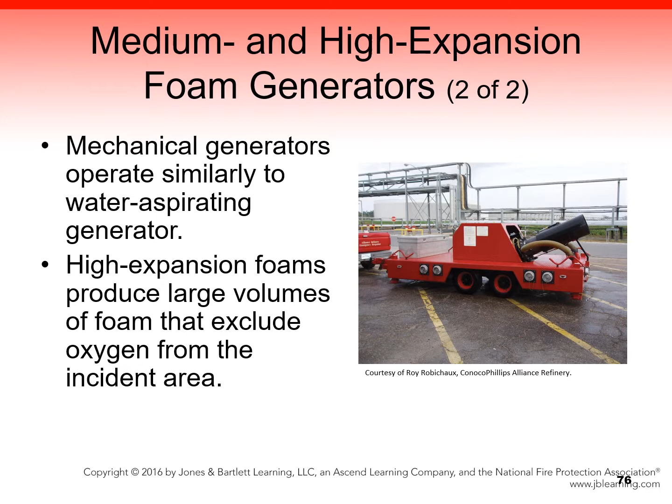Master stream foam nozzles allow operators to deal with large incidents where handline nozzles are not able to handle the demands for foam suppression. They can be supplied from the fire apparatus's onboard systems. Alternately, they can have an eductor as part of the nozzle. A pickup tube draws the foam into the master stream nozzle, and this tube is placed into the foam concentrate supply and operated as an eductor system.

Master stream foam nozzles can be mounted permanently on the fire apparatus, can be removable so that they can be used as a portable unit, or can be strictly portable devices.

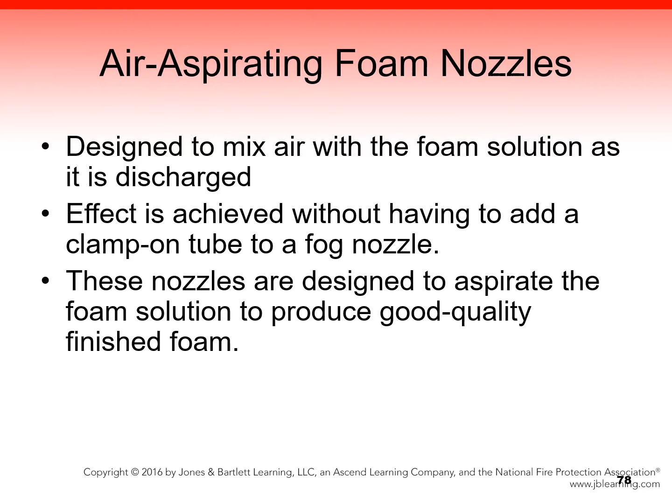Air aspirating foam nozzles are designed to mix air with the foam solution as it is discharged. This effect is achieved without having to add a clamp-on tube to a fog nozzle. These foam nozzles are designed to aspirate the foam solution to produce good quality finished foam.

Smoothbore nozzles are the nozzle of choice when using a CAFS. Because the aeration of the foam solution takes place in the piping and hose, the finished foam will be discharged at the nozzle. Application, not aeration, is the major concern when smoothbore nozzles are used with a CAFS.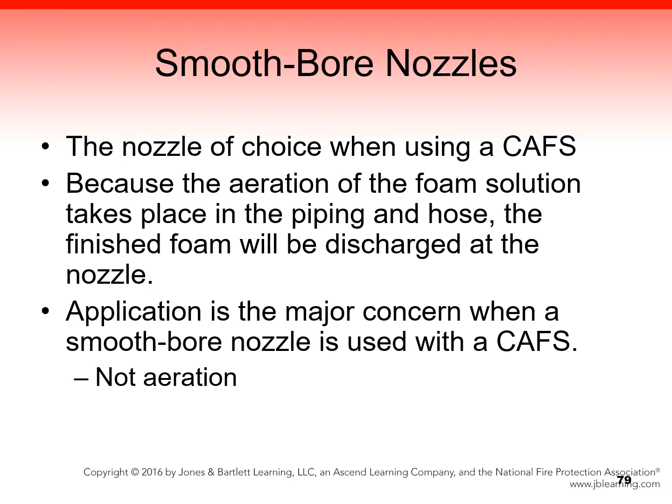Fog nozzles can be used to produce finished foam. When the incident involves polar solvent fuels, for example, fog nozzles may not deliver a foam quality that is able to extinguish the fire. Foam aeration tubes are available that can easily and quickly be clamped onto the end of a fog nozzle to aerate the foam solution more efficiently.

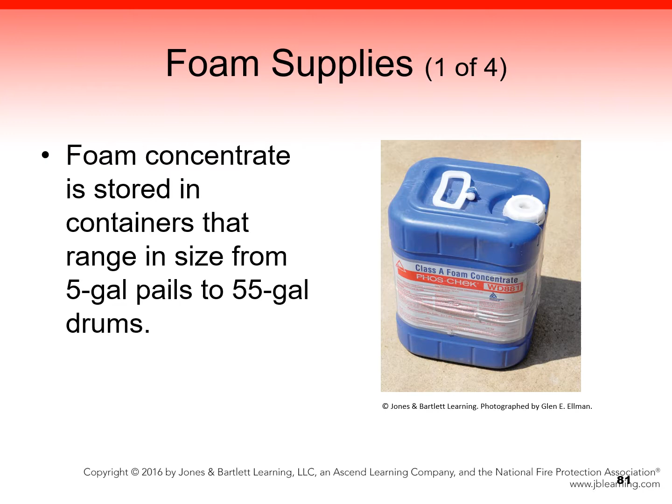Now let's discuss foam supplies. Foam concentrate is stored in containers that can range in size from 5-gallon pails up to 55-gallon drums, as shown in illustration figure 14-20. Totes and trailers of foam concentrate are available in different sizes as well, ranging from 100 to 1,000 gallons of foam concentrate. Foam may be stored in its container without any change in its original physical or chemical characteristics.

Freezing and thawing usually will not have any effect on modern foam concentrates. It is important to check with the concentrate manufacturer for technical information on the concentrate's properties, however.

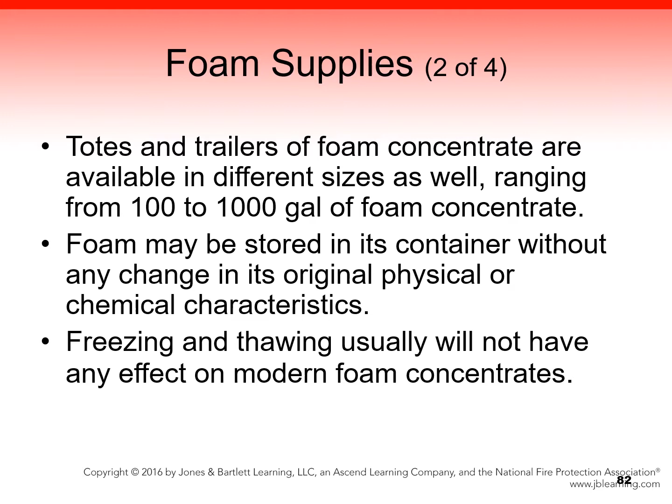The shelf life of foam concentrate will vary depending on the type of concentrate. Typically, protein concentrate has a shelf life ranging from 7 to 10 years. Synthetic concentrates and high expansion concentrates have a shelf life of 20 to 25 years.

The environmental impact of foam has been a concern for many years. Many types of foam have undergone testing to assess their effects on the environment. Information regarding the toxicity of foam concentrates is usually available from product environmental data sheets, material safety data sheets, product technical bulletins, and toxicity summary sheets. The manufacturer or supplier of the foam concentrate is a primary source for researching this information.

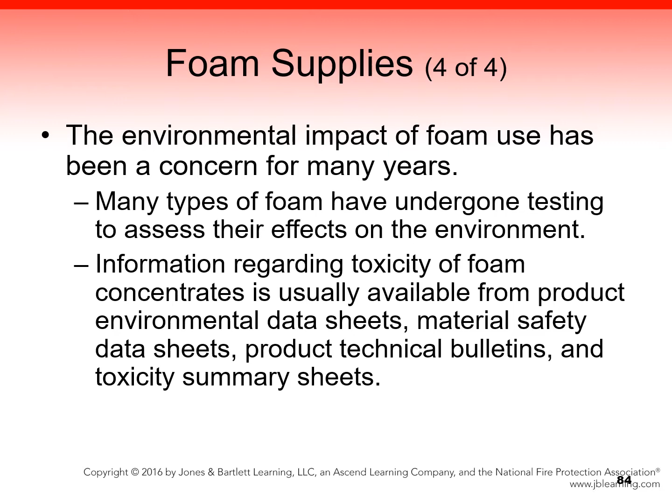Now let's talk about applying foam. Class A foam is used for structural firefighting and is becoming more common in practice. The benefits of using foam to extinguish a Class A fire or an incident involving three-dimensional fuels have been proven through testing done by manufacturers and fire departments.

Class B foam. The methods used for Class B foam on Class B fires differ from those used when applying Class A foam on a Class A fire. Directing a Class B foam stream onto a Class B fire can disrupt the fuel and cause the fire to spread. Plunging the stream into an existing foam blanket will allow vapors to escape. This can result in a spreading, reignition, or flare-up of the fire.

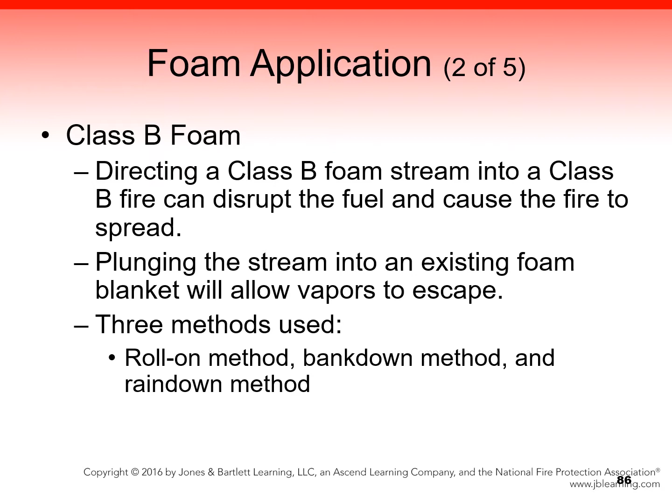The sweep or roll-on method should be used only on a pool of flammable product that is located on open ground. With this technique, foam is placed on a fuel surface by directing the foam stream onto the ground in front of the product involved. The foam will then roll onto the surface of the material involved.

It may be necessary to move the hose line to a different position to achieve total coverage. You may also need to use multiple lines to cover the material. If the crew uses multiple hose lines, they need to maintain awareness of the positions of other firefighters operating in the area. A coordinated attack should be conducted by the IC. A safety officer should be on the scene. To perform the roll-on method, follow the steps in Skill Drill 14-8.

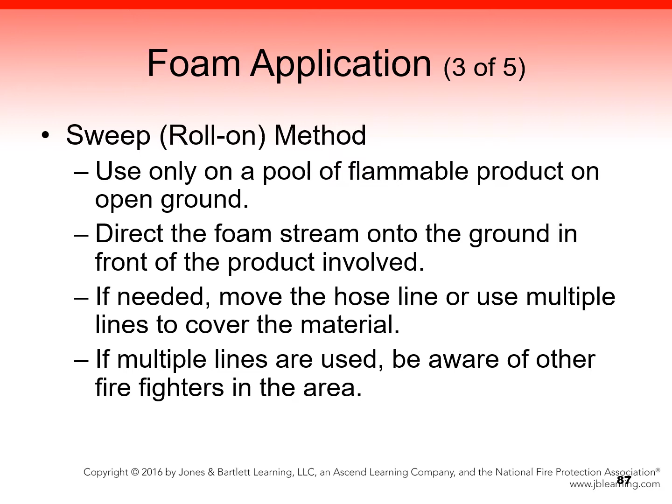The bank shot or bank down method is employed at fires where the firefighter can use an object to deflect the foam stream and let it flow down the burning surface. This application of foam should be as gentle as possible to avoid agitating the material involved. If the material is located in an area where there is a wall, a tank, or another vertical object, the foam can be directed at and allowed to run down that object. This approach will allow the foam to spread over the material and form a foam blanket. To perform the bank down method of applying foam, follow the steps in Skill Drill 14-9.

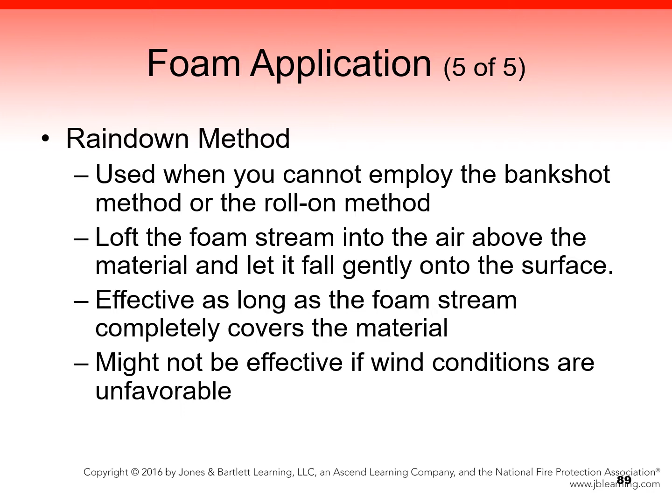The rain down method can be used where there is no vertical object to use for a bank shot and it would be too dangerous to get close and use the roll-on method of foam application. This technique consists of lofting the foam stream into the air above the material and letting it fall gently onto the surface. It can be effective as long as the foam stream can completely cover the material involved. Two caveats apply: first, this method might not be effective when wind conditions are unfavorable, and second, the covering of foam needs to be monitored, since the fire itself may vaporize the foam stream, producing reduced results. To perform the rain down method, follow the steps in Skill Drill 14-10.

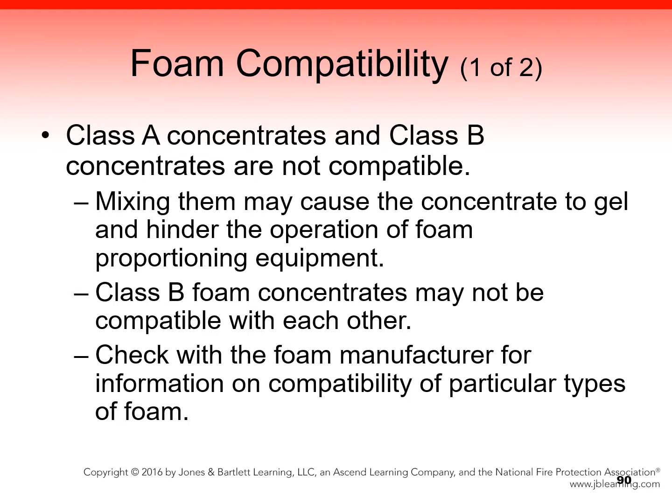Now, with foam compatibility, Class A concentrates and Class B concentrates are not compatible. Mixing these different classes of concentrates may cause the concentrate to gel and hinder the operation of foam proportioning equipment. Class B foam concentrates may not be compatible with each other. Check with the foam manufacturer for information on compatibility of a particular type of foam.

Make sure onboard tanks of fire apparatuses are properly marked. Many fire apparatuses carry onboard water, Class A foam concentrate, and Class B foam concentrate tanks. In some instances, foam concentrate has been poured into the wrong tank with undesirable results.

So in summary, while water is effective in suppressing fires, foams have added a new dimension to firefighting strategies. Foam for firefighting consists of a stable mass of small air-filled bubbles. It has a lower density than oil, gasoline, or water and will float on top of the fuel.

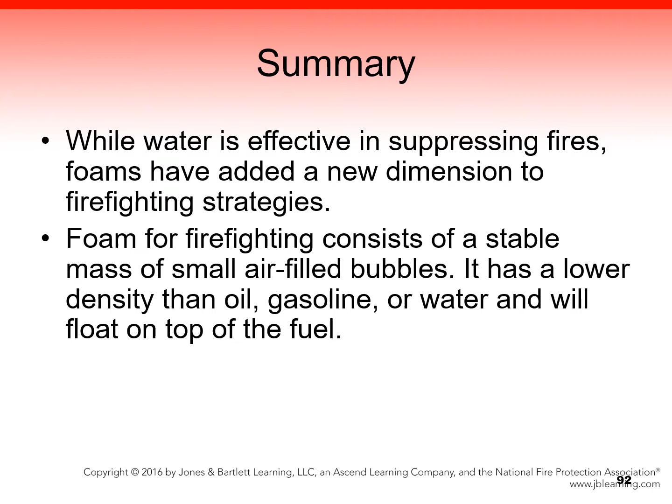The way that foam works to help extinguish a fire is very simple. Once applied to the burning fuel, the foam will float on top of it, forming a blanket on the surface. This blanket, if applied correctly, will stop or prevent the burning process by separating the fuel from the air, lowering the temperature of the fuel, and/or suppressing the release of flammable vapors.

Foam is made up of four components: water, foam concentrate, mechanical agitation, and air. Firefighting foams are classified as either Class A or Class B. Foam concentrates are designed to be mixed with water at specific ratios ranging from 1% to 6%. The foam expansion rate quantifies the ratio of finished foam to foam solution after the mixture is agitated and aspirated through a foam making appliance.

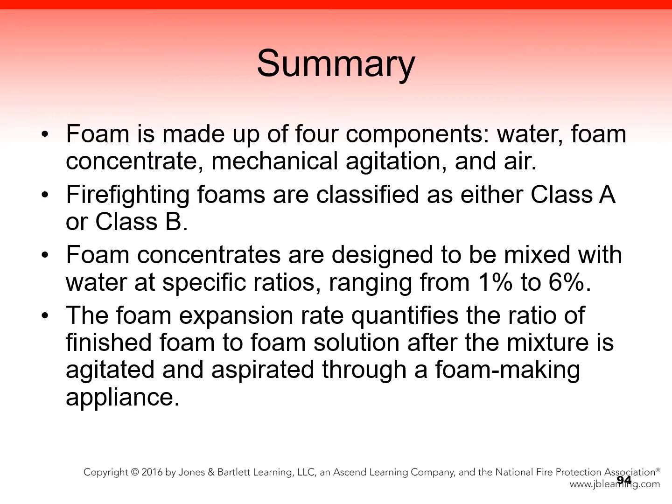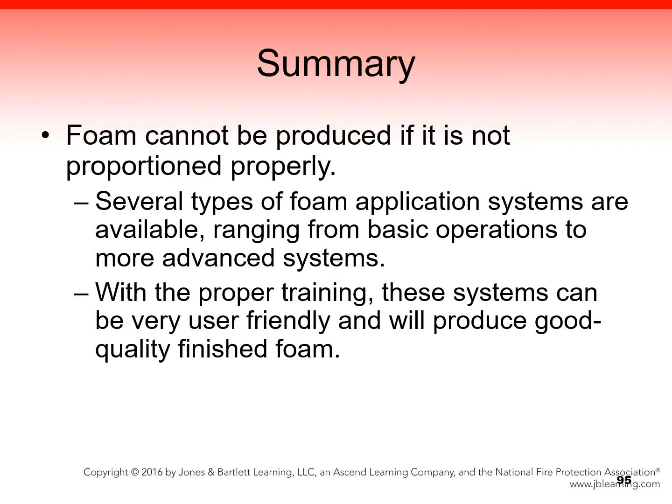Foam cannot be produced if it is not proportioned properly. Several types of foam application systems are available, ranging from basic operations to more advanced systems. With proper training, these systems can be very user-friendly and will produce a good quality finished foam. The proper nozzle is needed for firefighters to be able to produce a good quality foam blanket. Foam concentrate is stored in containers of various sizes, including 5-gallon pails, 55-gallon drums, totes, and trailers.

Knowing the several accepted methods for applying foam is important for driver operators because they may have to use a hand line to apply foam or may need to assist other firefighters in the application method. Class A concentrates and Class B concentrates are not compatible, and mixing these different classes of concentrates may cause the concentrate to gel and hinder the operation of foam proportioning equipment.